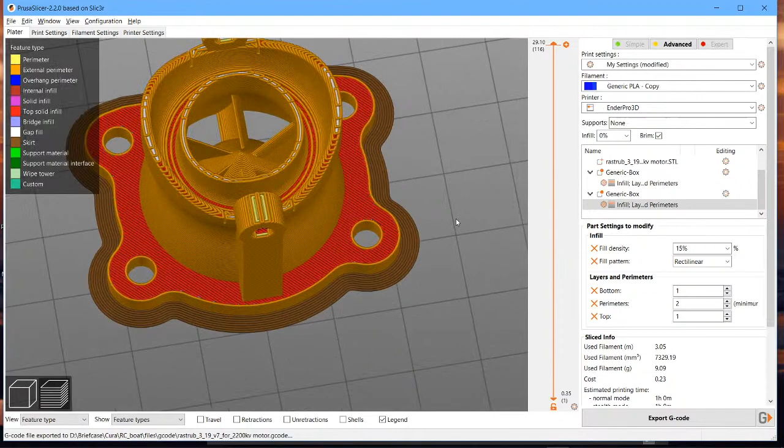Some people seem to favor one slicer over the other. I think the difference between Cura and Prusa is negligible. Prusa just seems to be more efficient on the overall code, the G-code that it produces, and I'm liking it more because it has the lovely, you can see me pinch and zoom here, and rotate. I'm just using my finger. You probably see the dot appearing on the screen as I move it around, and then pinch and zoom. I like that feature. Cura doesn't have that feature.

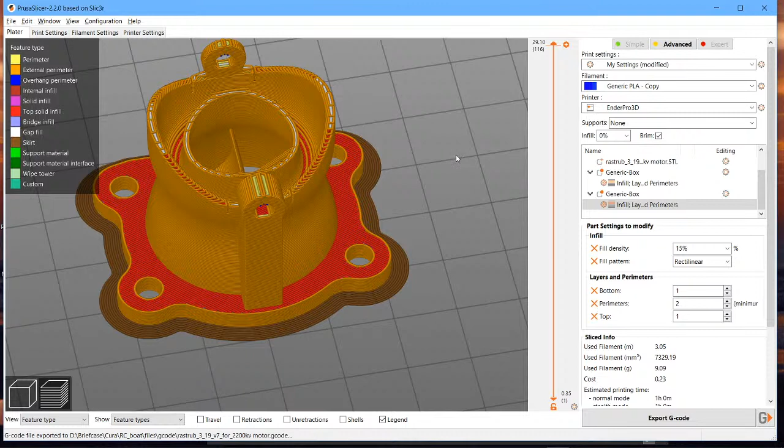This is off the jet boat, and it's the nozzle which needs to be printed pretty accurately, especially because you don't want any artifacts oozing, other issues. You can see there's a curve in here, so this has to be very accurate. We don't want any blobs on the top of that. We want this to be pretty much smooth. All these holes to be round and smooth.

Effectively, what you see is what you get is what you're aiming for. WYSIWYG, but printing style. So what you're physically seeing here, when it slices and it prints, is pretty much what that object should be doing without any of the issues. And that does take a bit of time to learn.

A couple of modifiers I've done then. There's a nice feature both Cura and Prusa have called modifier. And you can kind of find it under these settings here. If I just click away there, we'll click on this, right? So I'm on effectively the preview. What I've done is I've added a couple of modifiers.

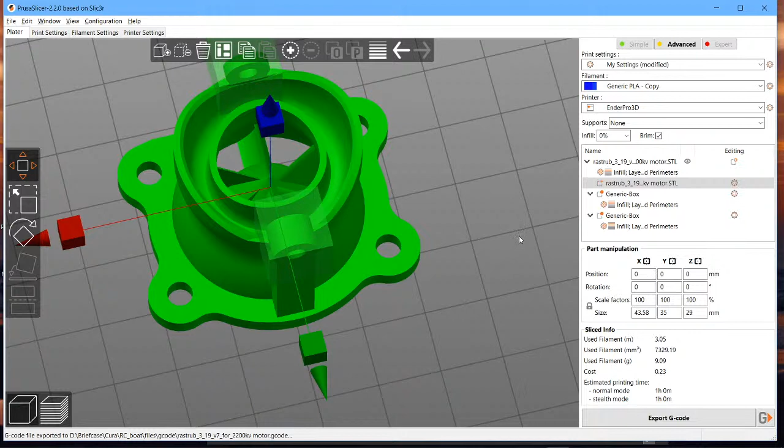A modifier is saying, well, I actually want to have two modifiers, these blocks here and this block here. You can create different shape modifiers to allow me to define the individual settings when it reaches this block, this zone, if you like, treat that like a zone. I want this modifier to change the fill density, the infill, the wall thickness, etc. for the specific block and the specific block.

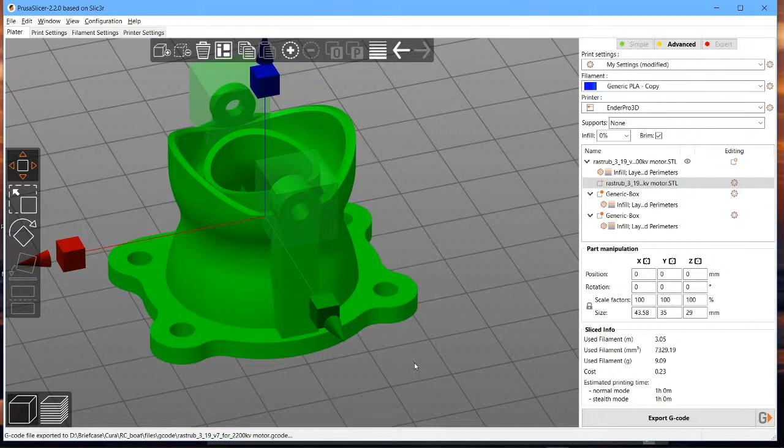Now, why would I want to do that? Well, these areas are prone to cracking when you put the bolt in here, or they're a little bit more fragile. These areas aren't so bad because you're probably using 15% infill or more in these areas. Probably got thicker layers in here. Probably got a top layer of 2 here, a bottom layer of 3 here. So these are already thickened up. You've probably got 15% infill in there. But here you want to give some extra strength in these two portions.

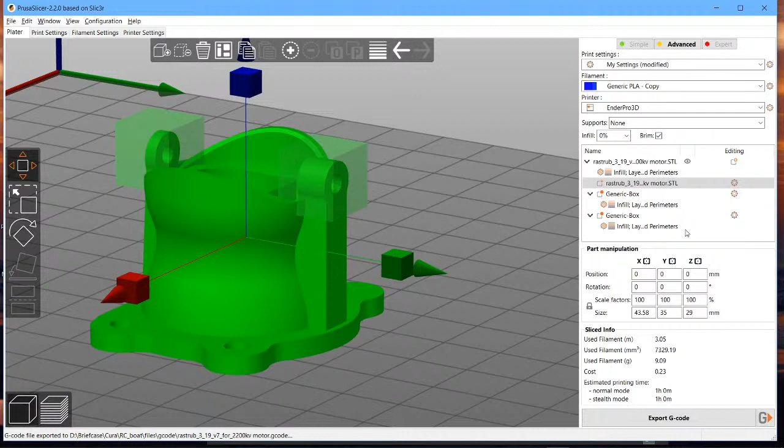So what you can do is, under your editing, you can go and add something called a modifier. And what you want to do is you want to add a box, in my case, or a cylinder, or a sphere, or a slab. I've chosen box because it pretty much is going to fit within this realm here, right?

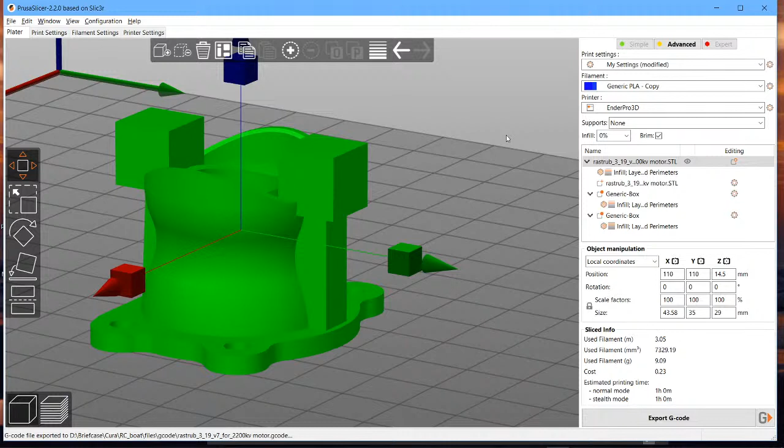Once you add this block, you then can position it, right? You also want to size it. Originally, the block will start off down the bottom here, and you just have to drag it and position it and use the Z-axis, the X-axis, the Y-axis to move it around. I'll just move that back to where it was, but you can see I can do that.

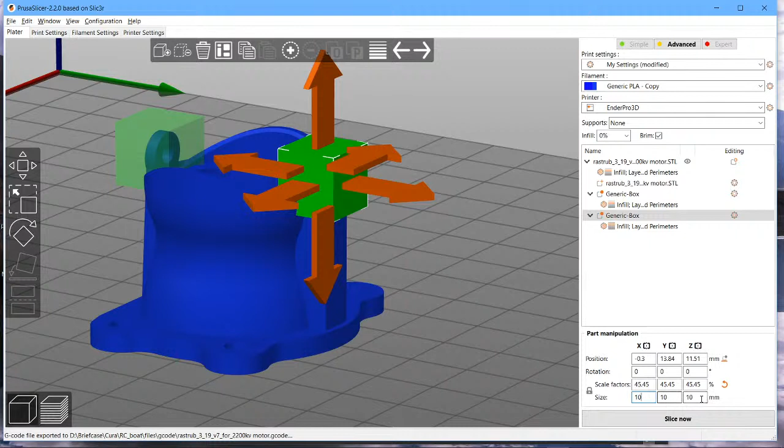Now to set the scale of it, you click in here in the size field, and then you've got the scale. You don't drag these. What you do is you set 10 millimeters or whatever your block size is to be, and it will then scale that across uniformly. You can individually set them as well. So you want to set a 10 millimeter block, and that will be fine. And then you position that where you want the block to appear. Yeah, so it's pretty straightforward to do that.

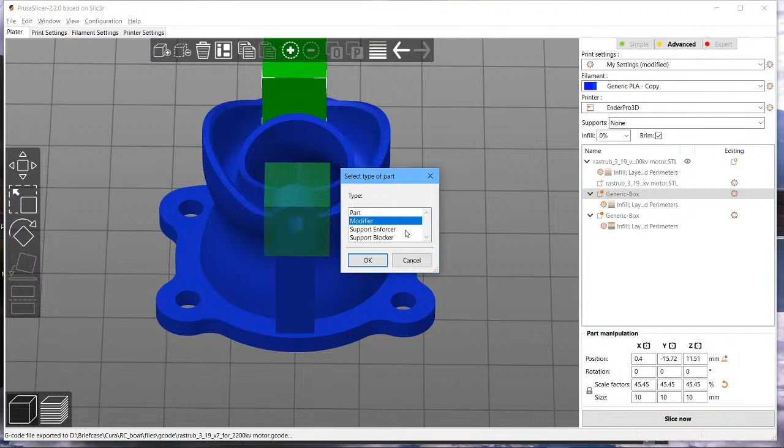And then the next thing you do, once you've done the modifier, is you go and say, well, actually, I want to have this modifier with a different infill and a different layer type, or I want to change its type altogether. I want it to be a modifier, a support enforcer, a support blocker. I want this to be a modifier. And then with my new infill and perimeters, I'm going to select 15%.

Currently it's using 5% for the overall object, but for this specific block modifier, I want to use 15%, one top, one bottom, two perimeters. I think I've got one perimeter in this overall, three on the bottom and two on the top.

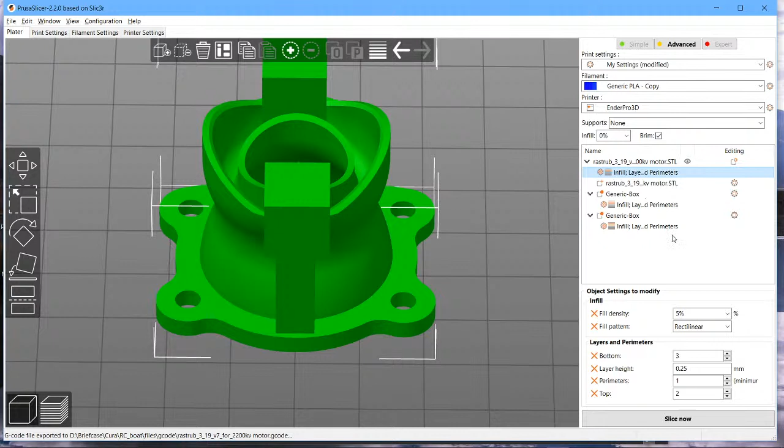So effectively top layer here, top layer here, these will have the generic settings, which are here. So these settings are generic for all of the object, but for this box, let me just make sure which box we're on. That box that's highlighted, I want to have a 15% rectilinear, one bottom, two perimeters, one top. For that one, I want the same kind of settings.

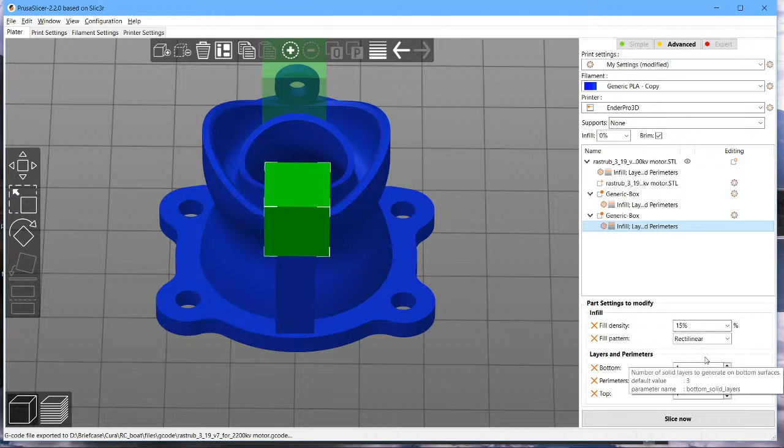When I slice this, just wait for that to slice. There you go. And I just rotate that around. I'm going to use the slider. Again, you can use your finger on there as well. Can you see how much thicker it is in these two sections? And if I zoom down there, go through the layers again, it's still showing a thickness in here.

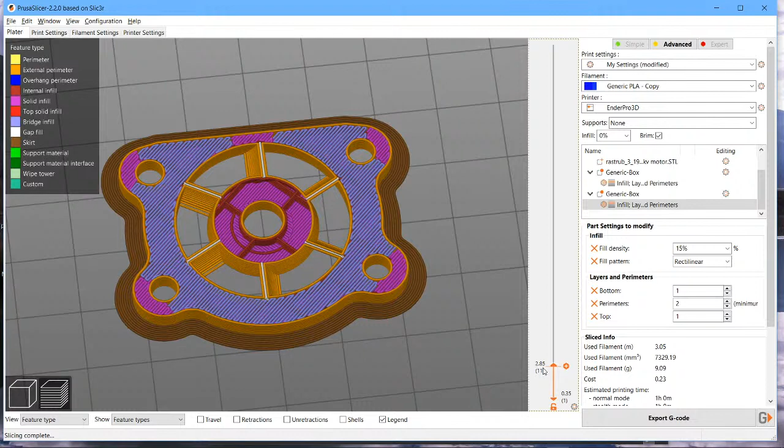And then as I go further down, it's going to go through its normal. But you can see how that block is creating a thicker, more rugged structure, whereas the rest of this is 5% infill. And down the bottom, I can see my 5% infill, and then my three layers down the bottom there. You can kind of see it there. So that's how you do that in Prusa.

Now let's export the G-code. I'm going to click on this one. So I'm going to say this is the beefed up Prusa model. I've already created one. What I'm interested in though is to look at the size of it. So what's the size? 1831 kilobytes. All right, so make a note of that. 1831.

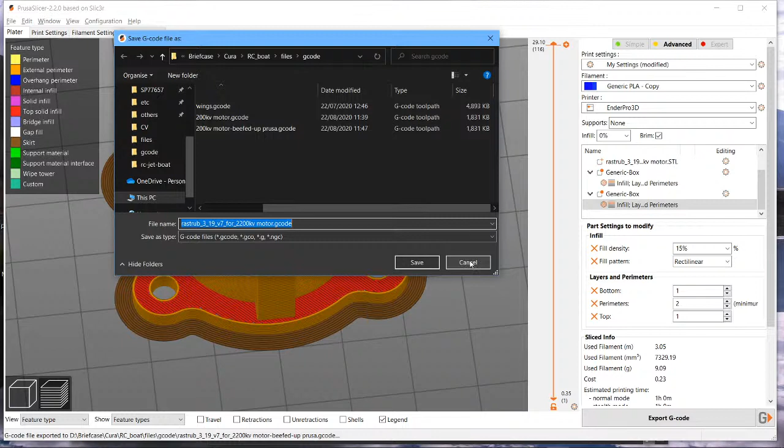With the Cura slicer, I can do a similar kind of thing. I can put two blocks in here. It's slightly different, I kind of covered it in other videos, but you would select the entire object. You would come down to here and you would add support blocker. And then after you've added support blocker, you position your block similar to what I've done on the other one. And then you use per model settings.

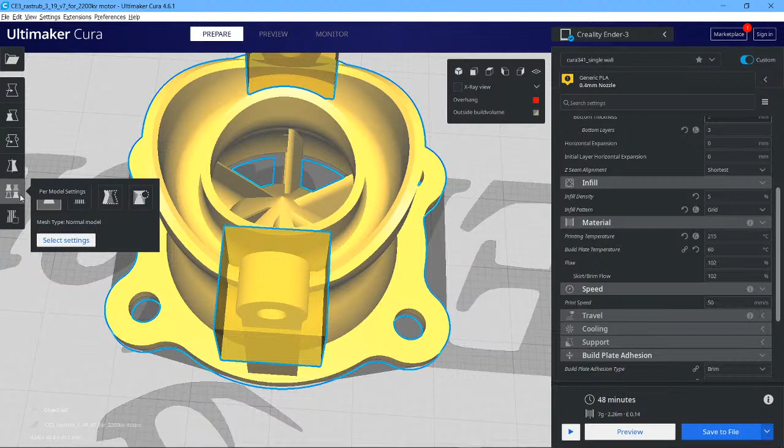You select, I think, that one. You select your settings and you say, I want infill, blah, blah, blah. My settings, infill density. Well, I've already done this one. There's no need for me to set additional settings, but it's the same kind of procedure. Again, I slice it.

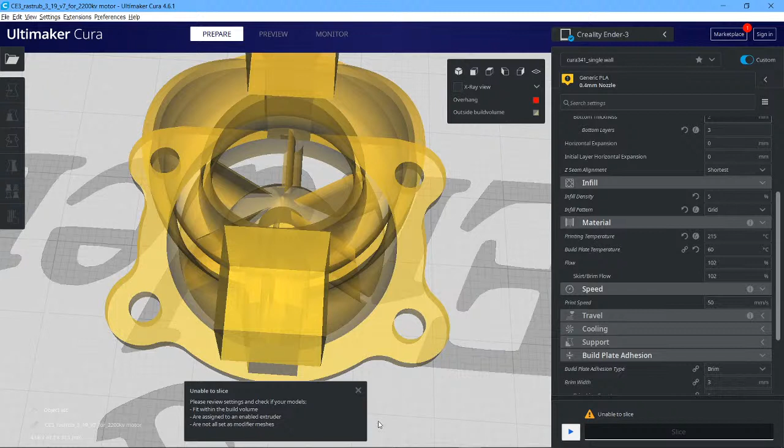Okay, while that's playing up, I'm going to Control Z on that. Z, Y. Let's see if I can just force it to slice. Okay, looks like I'm going to go back here and set those settings. So let's do that. In fact, let's just make sure it's all in the right position to start with. Looks about right, doesn't it? Looks about level with the other side, maybe slightly bigger block. That's fine. I'm quite happy with that.

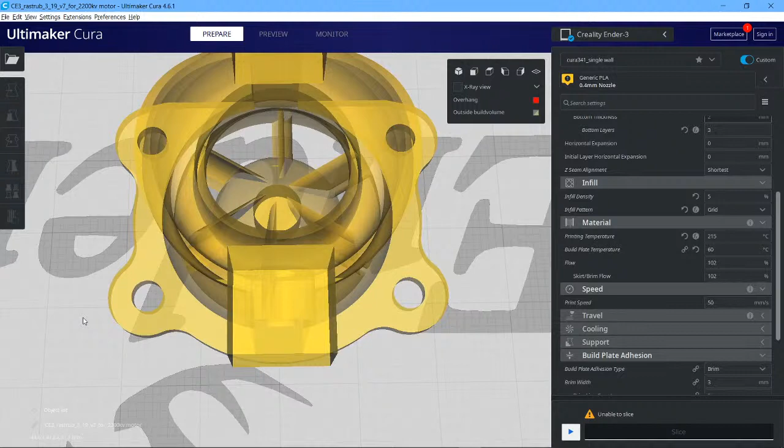Okay, let's select the object. Right, there you go. So again, I would select my wall count, my top and bottom thickness, probably need that to be 1. Wall count is 1, 15% triangles, that's okay. Select that one, top and bottom of 1, 15% triangles, that's okay. Let's see if I can slice it now.

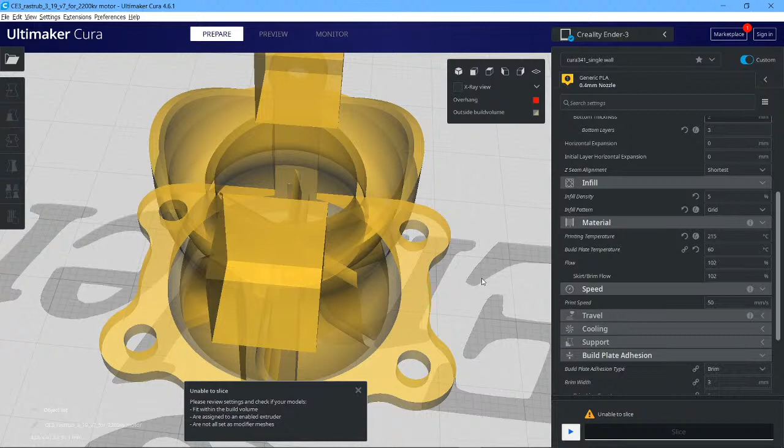Please review settings and check your models fit within the build volume. I think something must have moved. Let's see what has moved. Make sure that's sat on the bottom.

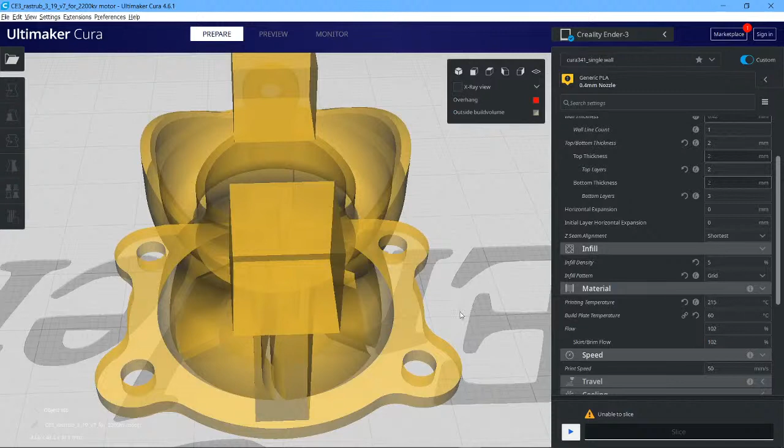Sometimes Cura does this. It gets in a bit of a pickle when you're editing. Everything is definitely within the build volume. It's within the size of the build plate. Let's go to preview. Yeah, it's kind of gone into a funny mode, I don't know, since I've flicked back between the two editors. Let's start it again then.

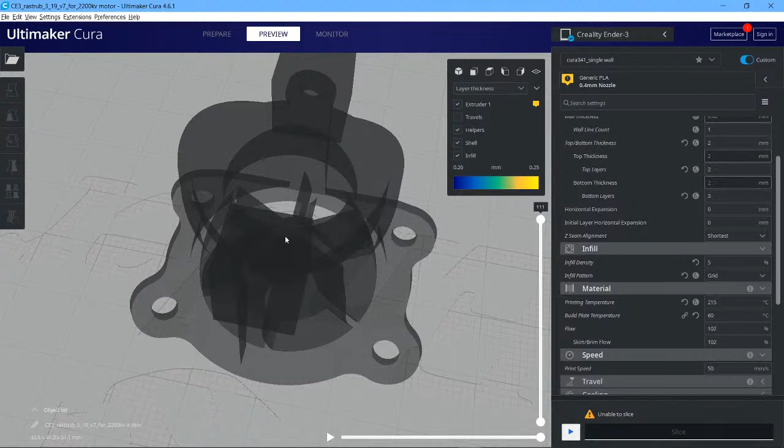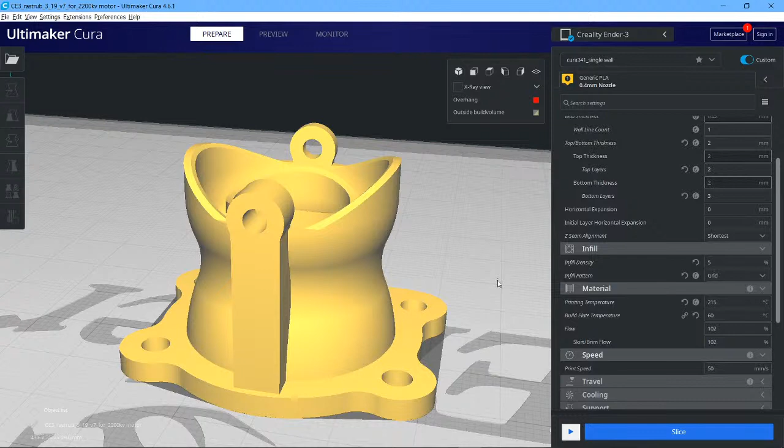Right, let's just Control A, delete, Control O. Let's go and grab the component so you can see me doing it from scratch. Make sure this thing is sat on the bottom, which it should be, because when it creates the brim. And let's go and add some support blocker. So select the whole object,

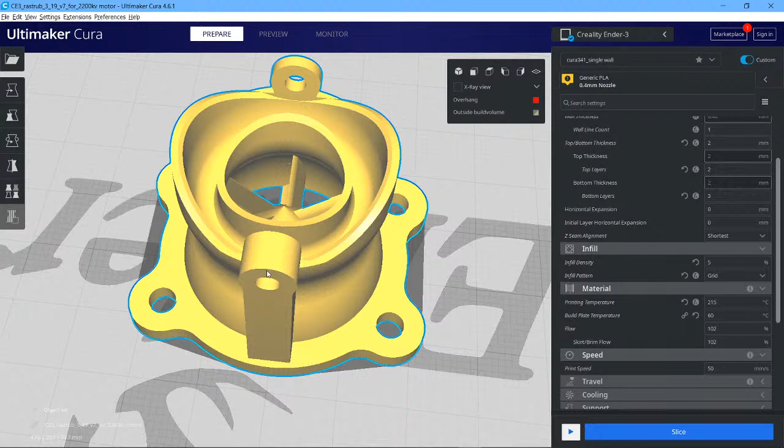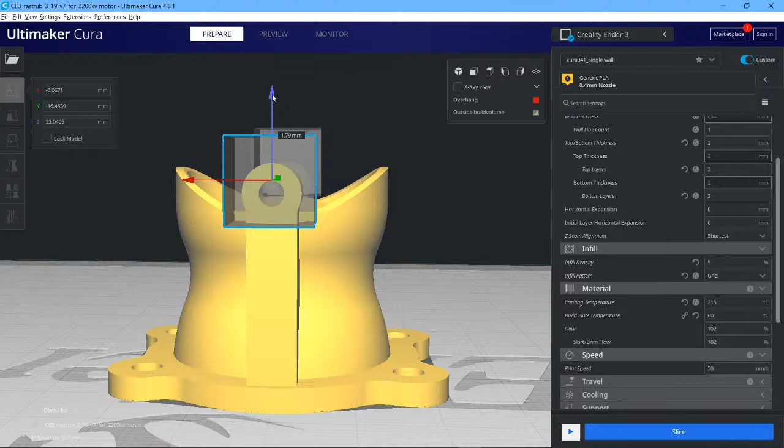and I selected this is support blocker. If I Control Z, do that again, but do it about the middle, about there, and Control Z, try that again. That's more like it. And will it do 2? Yeah, great. So then you can select the object, select move, basically position it where you want to position it. So I want it positioned around here.

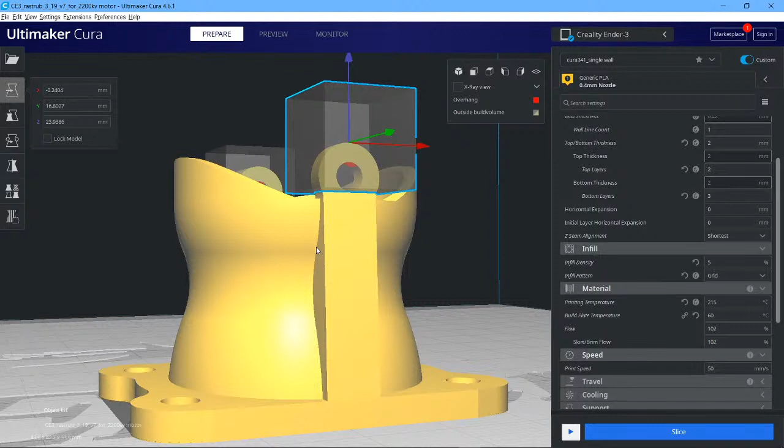You should right mouse wheel. Probably want that to go in here. This one here looks about right. Move that down to about there. Just rotate your field of view. Just check they're about level, roughly about the same position. Yeah, looks about right, doesn't it?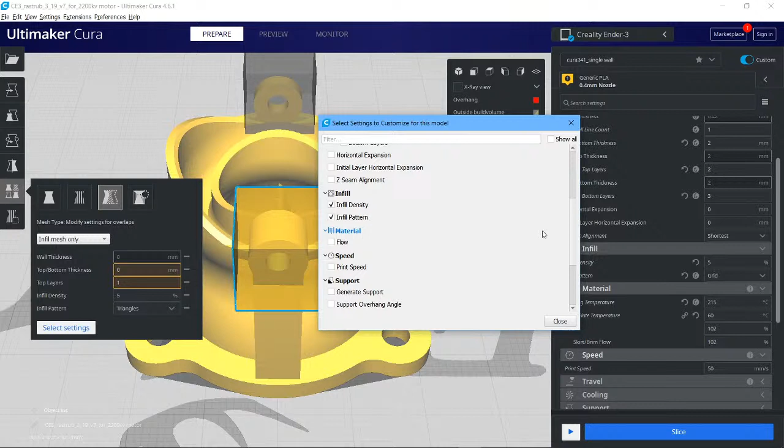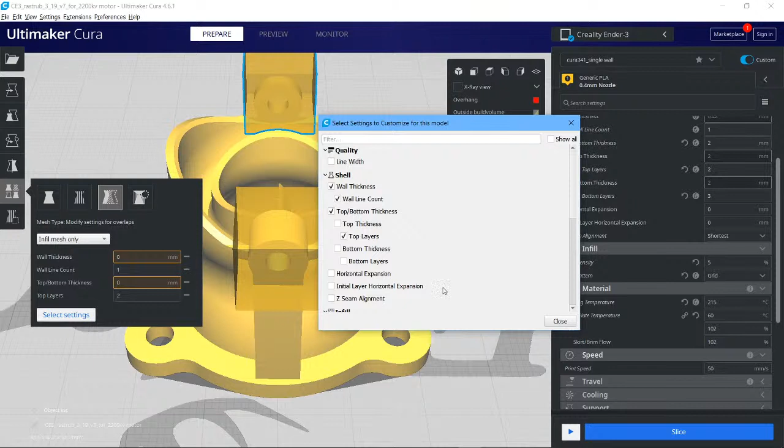Select settings. I actually want to go for a wall count value, not a wall thickness value, but a wall count value. And I want the wall count to be 2. Similar kind of thing with this block then. I want to select the settings. I want a wall count. I want to choose the top layer. I want to choose the infill density and the infill pattern. So wall count is 2, top layers 1, infill density 15%. I want it to be triangles.

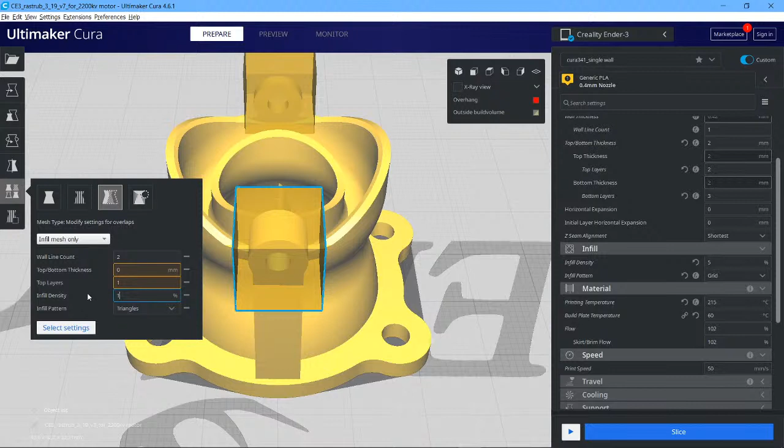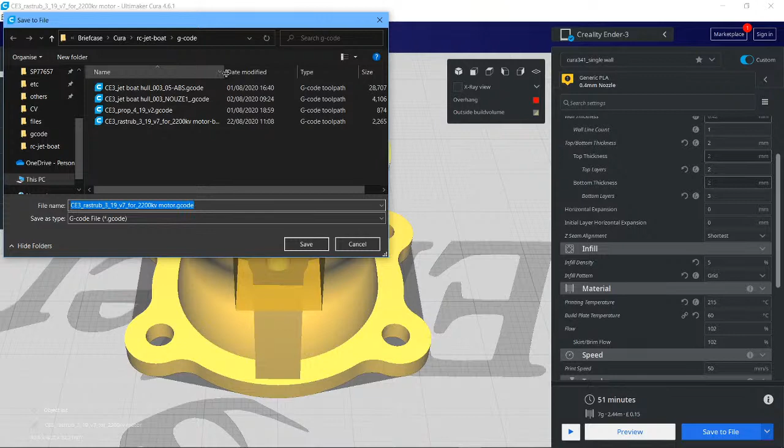That's okay. Double check this one. Wall count is 2, top. That should be 15% triangles. Okay, so similar kind of thing then here, and let's go and slice that. That's better. Yeah. Right, let's go and save to file. And we're going to call this one beefed up, overwrite. So it's updated. I'm going to open the folder. See the difference in size? Look, 2458. So there is a difference in terms of code efficiency.

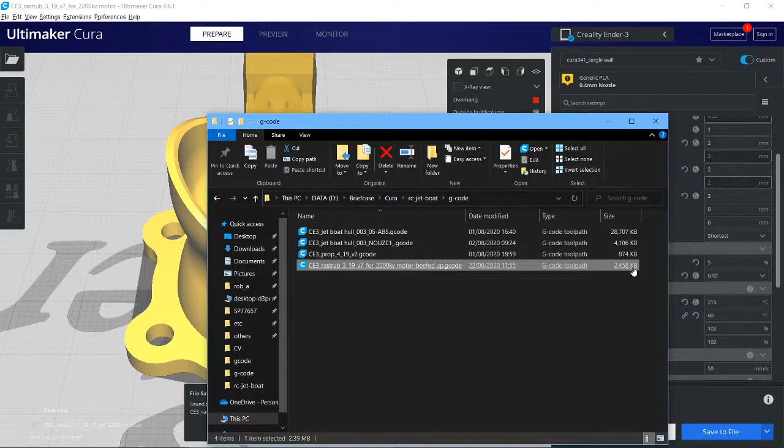This is 51 minutes compared to, let's have a look what it was for this one. Okay, it's interesting. So this one is 1 hour, smaller amount of code. Of course, this is an estimate, by the way. Both these are estimates. You will find when you get printing, it all comes down to your temperature, your print speed. Let's go and check the print settings. Print speed is 50, because there's probably a difference, I think, in the speed.

Print settings, general, won't be under machine limits. What's the extruder settings, filament settings, 60. I always struggle to find out where the print speed is. There you go. Yeah, it's 60, infill's at 55, support material 55. Yeah, I could probably improve the performance. But anyway, the main thing is you can do the same thing. In terms of efficiency of code, well, we can see there's a difference in size between the two slices.

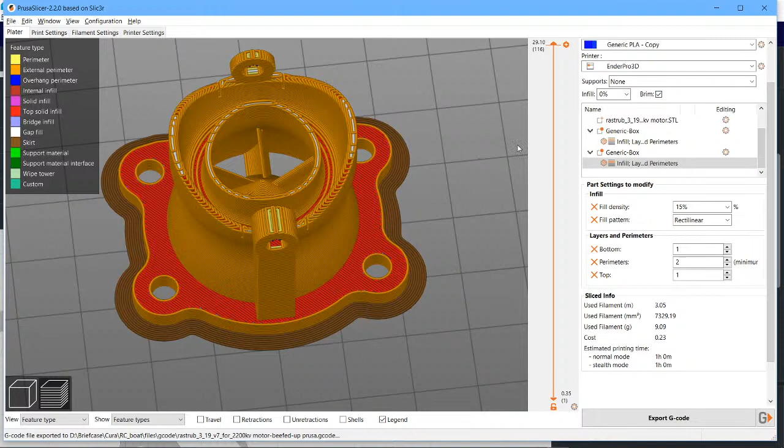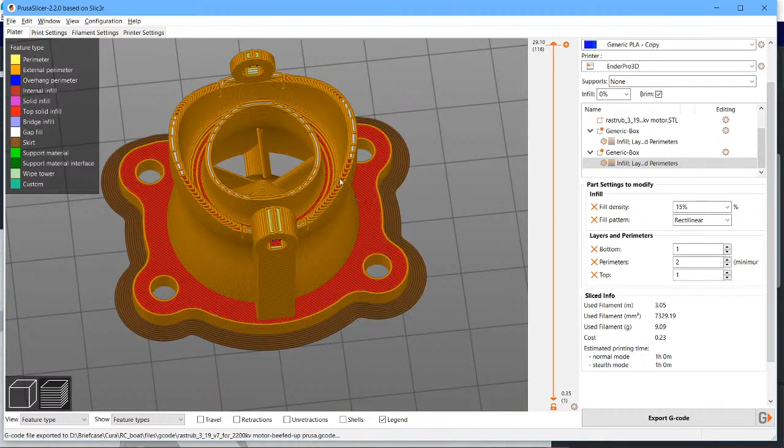I'm starting to like the Prusa slicer quite a bit more. I don't know why. I just find the way it prints very efficient. I do find Cura, oddly, is very good at printing TPU, and maybe it's just something I can't see that this slicer is doing compared to. So I'm printing small, very, very small TPU bushes. Cura seems to be very good at doing that. No idea why. Whereas if I do select the material here to be generic TPU, I'm not getting as good a print as I am getting in Cura. So that's what I've been learning.

Now, the other thing I have learnt is that the print head on the Creality Ender 3 Pro I've got, they tend to wear out within a year and a bit.

The Bowden tubes will wear, but also the head itself will just start to not be efficient. And you can tell that it's not efficient because you hand feed the material into the head. You release the extruder mechanism lever and you push in, and with just a bit of back pressure it should just start coming out on its own. If it's not and you're having to push really hard, it's likely you've got some kind of blockage, or the head itself is just wearing out temperature-wise.

And so I did replace this with a new one, and I noticed straight away that the print quality just improved amazingly. It was a lot better, a lot finer detail, and I could push it through, not a problem. And also when I pulled out the material, the PLA, it came straight out without backing up inside of the head. Now, what I suspect had been happening is where the Bowden tube goes into the head, you have to make sure it's cut off flush and pushed all the way down to the bottom.

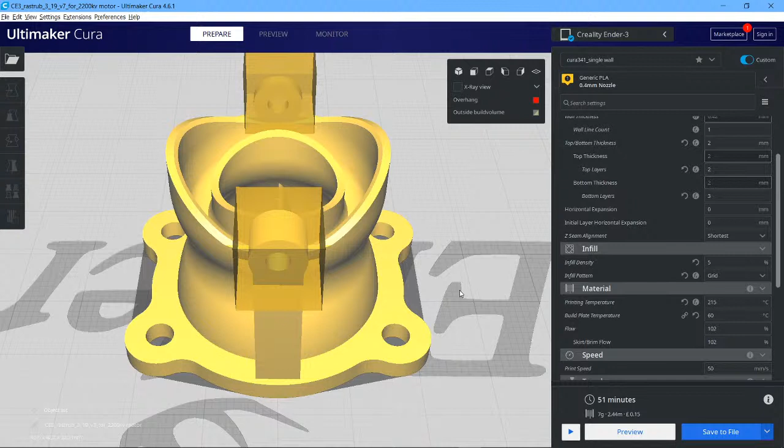I wasn't getting any accuracy problems, and with the slicer, what you see is what you get. In other words, what you tell it to print visibly comes out exactly the same. So there's some of the things I've learned over the past few weeks.